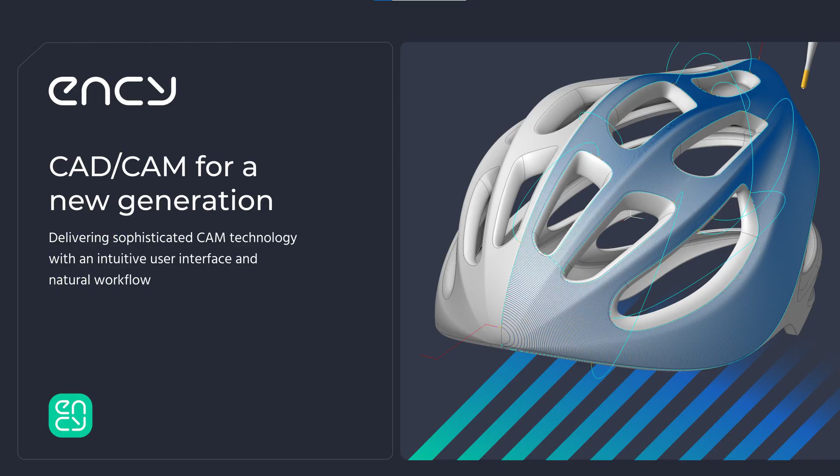First of all, of course, ENCY CAD/CAM software - CAD/CAM for a new generation. If I need to explain and describe this product in one sentence, this is it: delivering sophisticated CAM technology in an intuitive user interface and natural workflow. Why is that important? Because some guy on the internet, I read comments in social media, he started using ENCY several months ago and said, 'This is a technological monster.' And I agree with that. At the same time, we always keep our attention and focus on the interface in order to keep the workflow as simple and intuitive as possible. I believe if we multiply these two factors, the technological complexity and the interface intuitiveness, we get the quality of the CAD/CAM software as a multiplication of these two factors.

Because it's very easy to put more and more buttons in the interface, and you will end up with like 150 buttons on the screen, and you don't know how to use it. So what's the case with all this technology if you don't know how to use it? This is important for us.

Next, our second product, which is equally powerful, is ENCY Robot. This is an offline robot programming platform. It offers ultimate toolpath calculation and kinematics management software for industrial robots.

A couple of words about ENCY Robot. It's very different from ENCY for CNC machines, because when we initially released software for robot programming, we put all the CAD/CAM technology into this software and made it available for robots. By itself that's already impressive, but robots have more complex kinematics, and you need additional tools to manage them. That's why traditional CAD/CAM software cannot program robots. Those of you who do robot programming understand this very well.

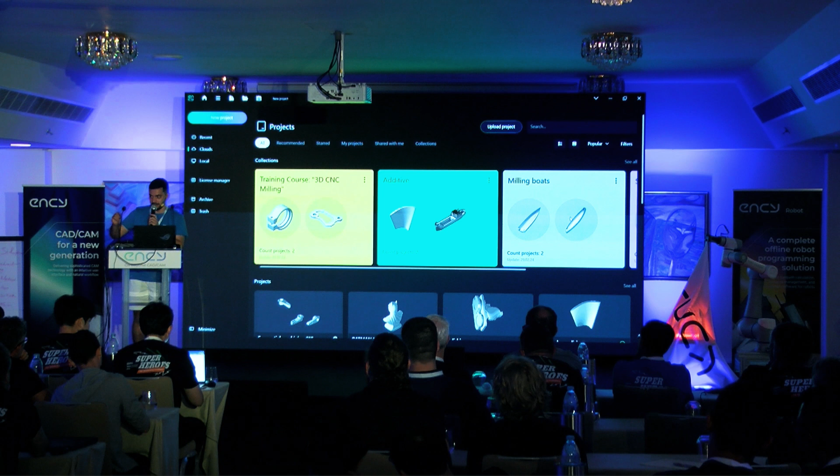In the cloud library, we introduce collections, so you can put projects into collections. You can use it for demos, for example mill-turn projects, put it into a collection, get a link, and send it to the customer, who can see it in a preview. What's the preview? For example, we can see this project from Italy, I believe.

If I click the preview, we have all the project metadata. We can see who is the author of the project, what machine is used, what are the operations in the project, setup, tools, everything. We even can preview the part, and we will also make a visualization of the toolpaths.

And this you can do without opening a project and without actually opening ENCY, because it's just a homepage. You can have it as a separate application. And here we have ENCY, the standard thing, ordinary thing which you are used to. If I want to open the project, I just click this button. Now the project, this is a cloud project, it just got downloaded from the cloud, and now you have your project in front of you.

One more important thing about the homepage: now you have the maintenance notification on top. We believe this will make it easier for you to sell maintenance to end users, because they are always aware of how long the maintenance is left.

So what are the highlights? Quick access to personal and shared library projects, preview of the projects, easy access to collaboration sessions, so all the cloud sessions are always also available from the homepage, and the maintenance banner. What I want to say here is also we have some future plans to put the machine library, post-processor library, 3D models, everything there.

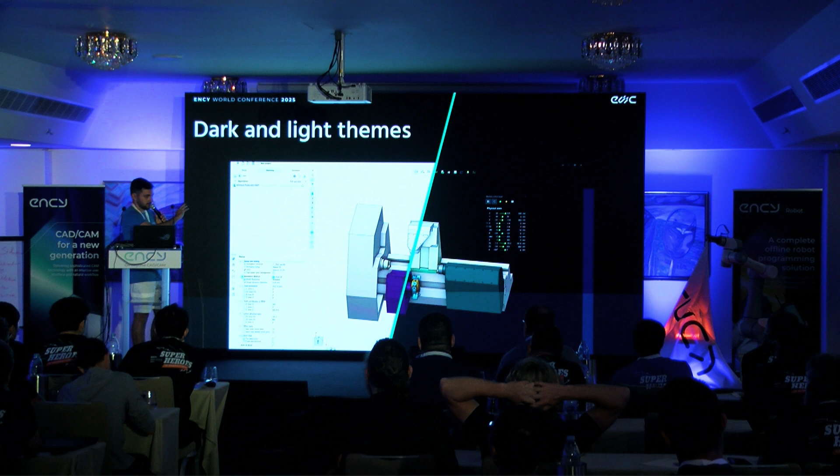Let's move on. Initially, ENCY was introduced in the dark theme. I think this is a good idea, and I like the dark theme very much, but there are still 5% of people who don't like it. During version 1, if the absence of a light theme was a deal breaker for you, now you have an answer to this. You just have a light theme now, so you can switch between dark and light theme. They both look good, and it's very easy to switch in the settings, and you can use either of them. Still, I want to say that we are going to use the dark theme as the main color of the software, and put all the videos in social media with the dark theme. Light theme is an option, let's say.

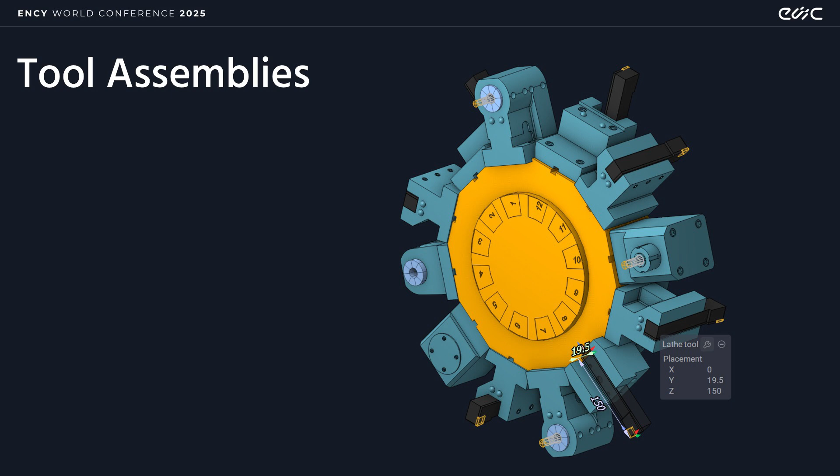Next, here comes the main part, here's the main thing beginning. Many of our customers work with mill-turn machines, we know it for sure. And thanks to our machine-aware technology, we have secured a strong position in this market. But we are making the next step, and today we introduce tool assemblies. This is a requested thing, which was requested for a long time.

So now you can create full tool assemblies, combining holders, adapters, whatever components you have for the cutting tools. I believe this new capability elevates ENCY to an entirely new level, and it's a really important thing. So let's take a look at a quick demo.

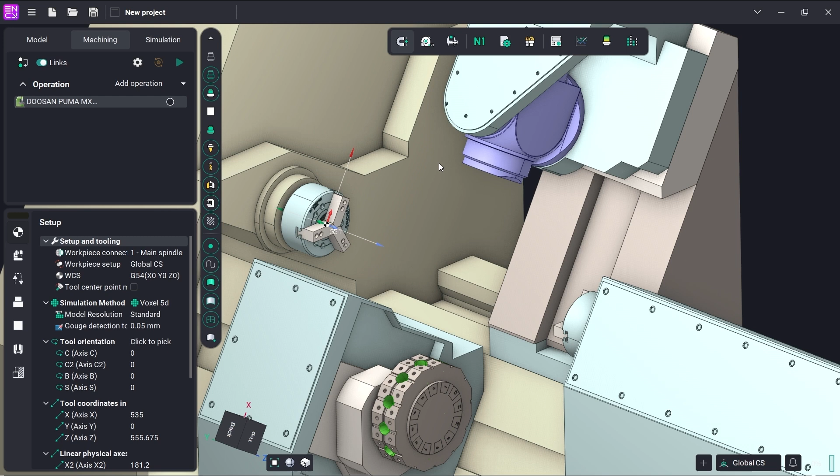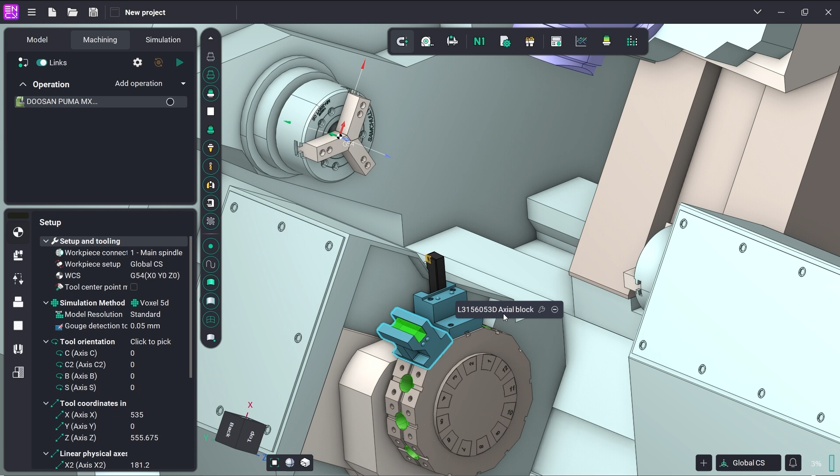So here I have the mill-turn machine, you all know how it looks. Now on the turret head, right here on the screen, I have interactive elements which I can use to create my tools. Right on the screen, without going anywhere, I can just combine my components, which I have in the library, and create tools for right spindle, for left spindle, lathe tools, milling tools, whatever kind of tools is required for this project.

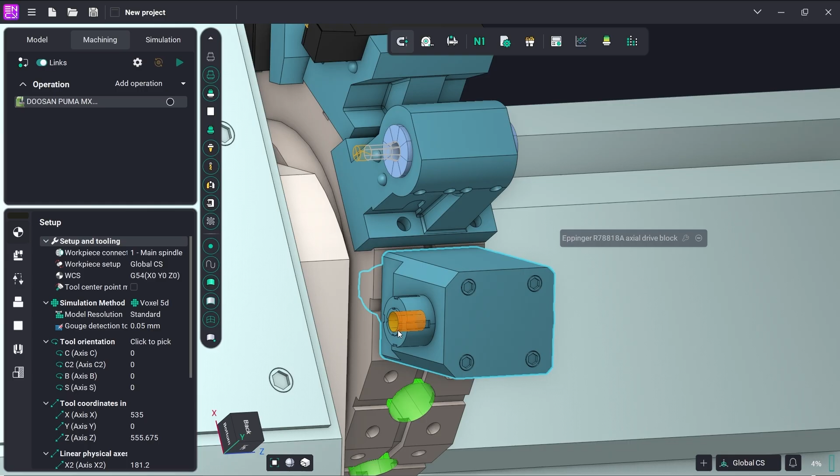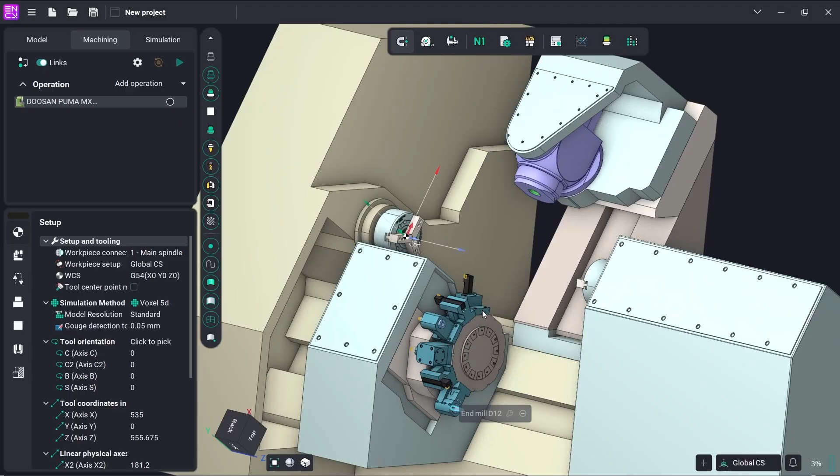Like this, you can combine not only two components, but any amount of components. For example, we have three components here, and I can very easily and very fast create the whole setup for the turret head, without going anywhere, in the same window which I use to create the project. This is how we see it, and I think this is a proper way this complex machine setup should be done, because you don't need to learn it—you just do it right from the beginning because it's intuitive. So you see, like in 30 seconds, I can create a setup with different tools on the turret head.

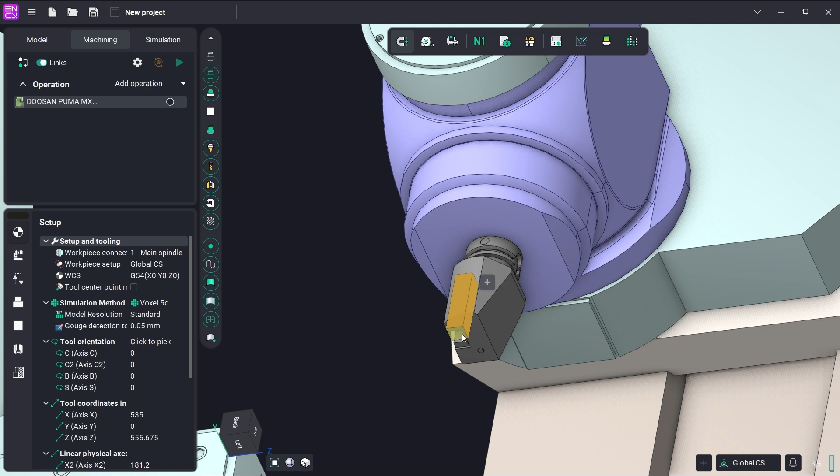And also, of course, I have a milling head in this machine, so I can use the same approach to create a tool for the milling head. Actually, I can put there also a lathe tool, no problem, or a milling tool, whatever. So this is it.

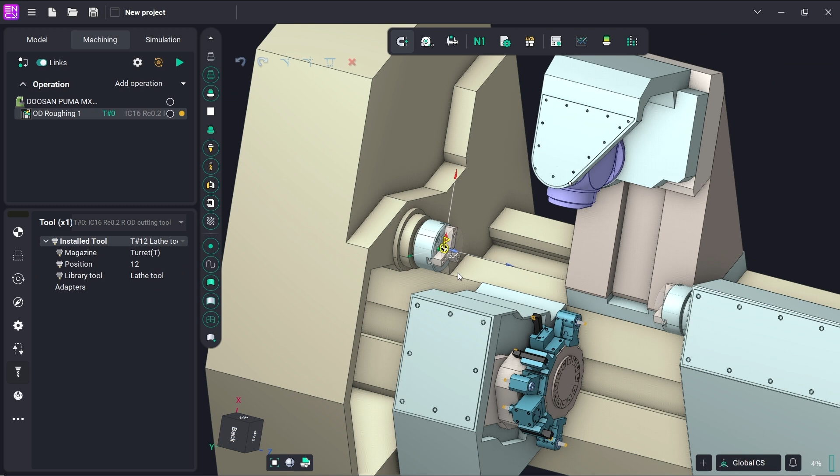Next, when you create an operation, it now knows which tools from the setup are applicable. In the dropdown lists, you have only the tools which you can use for the current operation, for the current spindle, from the setup that you already have.

And now we have a separate window—sorry, need to move it a little bit. So this is a components library. Here we have all possible types of connections from all the tool manufacturers. You have tools here; they are interactive and parametric. You can create your own tools, or you can import tool components from the machine or from tool builders' libraries.

On another tab, you have your machine setup. You can do it from here, or you can do it right from the main screen. What's important here is that when you finish with your setup, you can save it and use it for other projects. You have save and load options. So this is the main thing I want to show about the tool assemblies.

So what are the key highlights? Now you have tool assemblies, first of all. Second, you can import 3D models or create your own—if you don't have a 3D model of the tool, no problem, you can just use our embedded CAD to make quick modeling, no absolutely no problem. You have very detailed visualization, and not only visualization, because the tool assembly geometry is used for collision detection—very important. So now you have a precise tool assembly and all its components, and it's used for toolpath calculation and for collision detection.

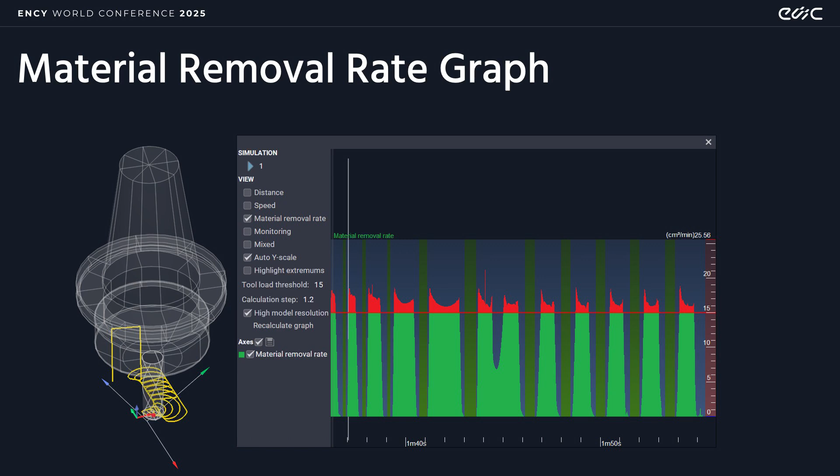Second, the material removal rate graph. This was relatively easy for us to implement, since we have our own simulation engine and already have all the information. Now you can just open this window and see how material is removed throughout the toolpath, for any toolpath.

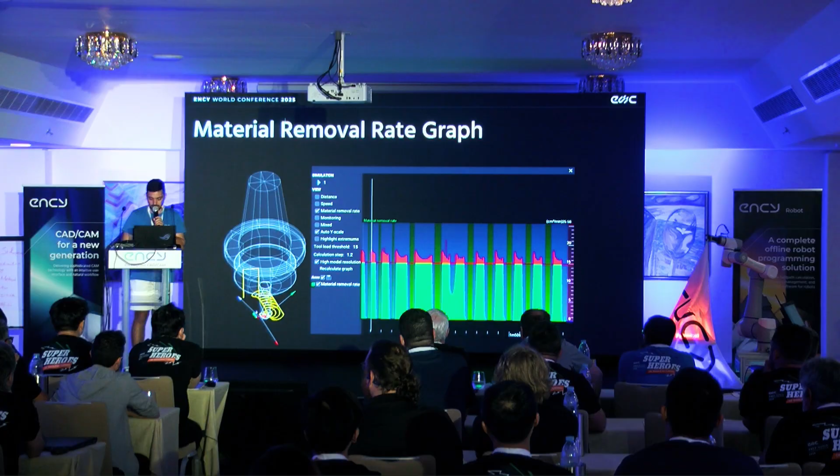Let's take a quick demo. Here is a typical project. I can just open this window and instantly see the material removal rate, and when I drag the mouse along the toolpath, I can see the tool movement at the same time. So I can visualize in which area of the toolpath a particular material removal rate takes place.

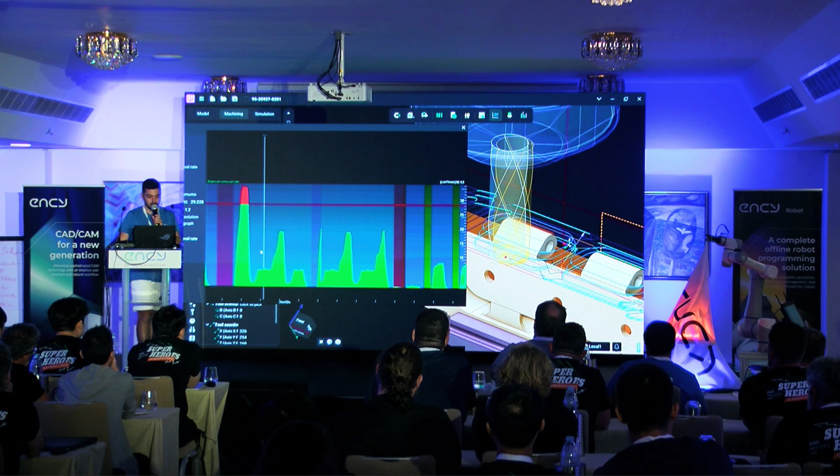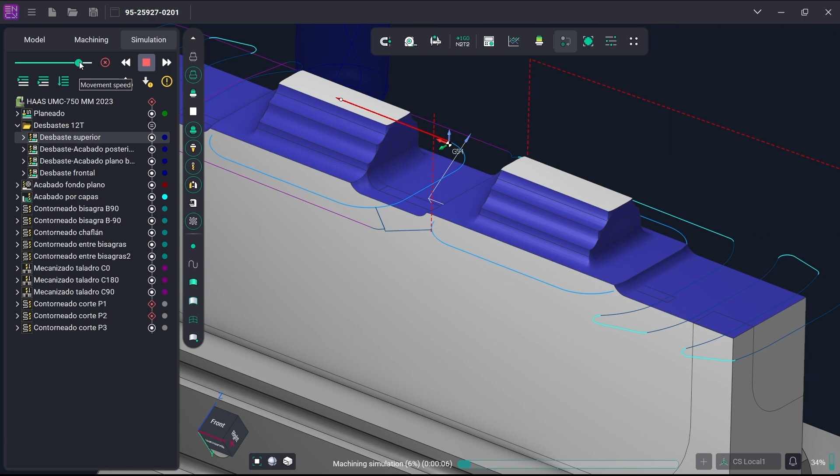You can use this before you launch the NC code, to make sure you're on the safe side and know how your tool will work throughout the toolpath. We don't yet have an algorithm to automatically change feeds and speeds on the operation, but I think that will be the next step. This is also huge for ENCY Tuner, because you can diagnose your NC code, even third-party NC code, with this tool very easily and see how it works.

Next, corner feed control. This is a relatively easy thing, but also very much requested. Now you have the possibility to define gradually how the tool slows down and accelerates while going through sharp corners—and not only sharp corners, but small arcs as well.

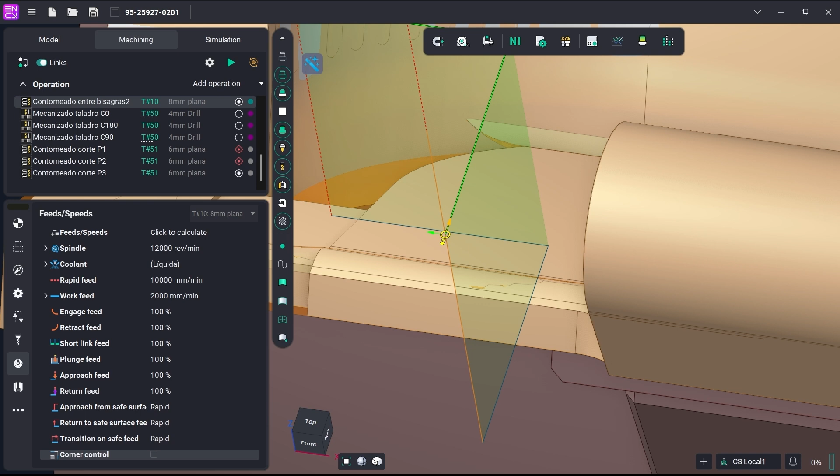Let's take a look. Here is a typical situation: we have a contouring toolpath and two lines of code with constant work feed. We can see the tool going through this corner at constant speed. This is not what we want.

So we enable corner feed control. Here are all the parameters you need—you can define the number of steps, the percentage of slowdown, the step length, everything. Let's recalculate the toolpath and see the result.

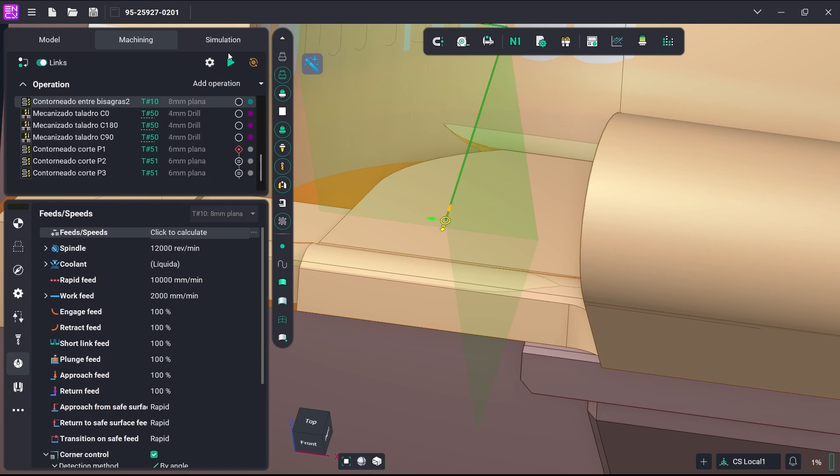I think it's clear, but let's take a look. Now we have several steps: the initial work feed is 2000 still, but the tool gradually slows down and then accelerates. As easy as that, but I think very important for certain situations.

Next, feed control for crossed holes. This is another situation where we need to precisely control feed rates, because if we don't, we can have problems—we can break the tool or fail to achieve the proper precision.

During the conference, we'll have a separate presentation from our dealer in Germany about this feature—he will tell more details. I'll just go ahead for now; you'll learn about it later.

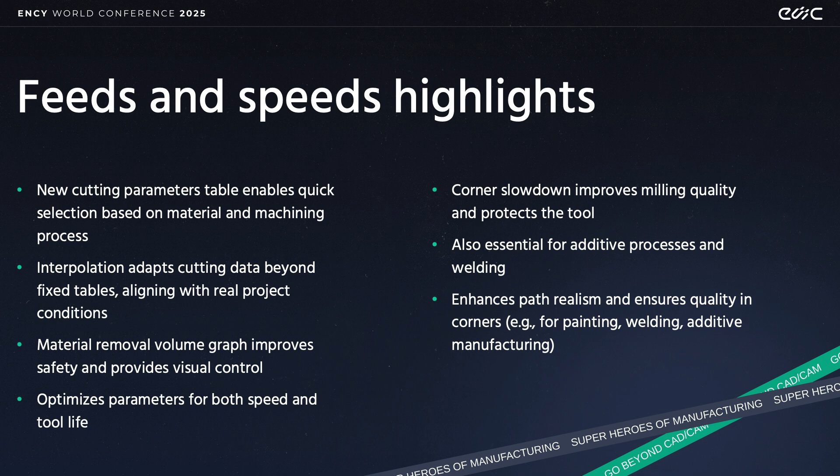So all in all, feeds and speeds are now very different in ENCY version 2—a lot of changes: the cutting parameters table, interpolation of these cutting parameters, the material removal volume graph, corner feed control—a lot of things at the same time for feeds and speeds. I think this will push ENCY to a new level for some customers. This is critical, this is very, very important.

Next comes the robot theme. I think some of you have been waiting for this, so here we are. First of all, we've had our collision avoidance algorithm for several years, and in some situations it works quite well. But as you all know, in some situations it struggles, and even when it works well, it's quite slow and makes a toolpath that can be scary for people—when the robot moves very fast with a very small gap, people don't like it. It's still a correct toolpath and it works, but people want to be a little more on the safe side.

So we completely re-engineered the collision avoidance algorithm. Not actually re-engineered, it's a new thing, okay? We built it from zero. Completely different approach, which takes into account not the local part of the toolpath, not the local area, but the whole toolpath, okay? It works on a different principle, and the main thing is it works now very fast. This allowed us to build something, in my opinion, very exciting. I will show you in a moment.

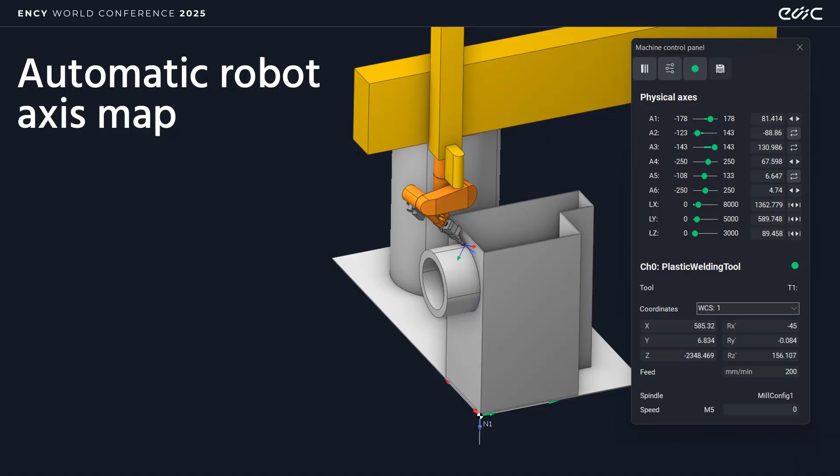So thanks to the new collision avoidance algorithm, now we have automatic robot axis map. Those of you who make robot programming know it for sure. But in some situations, for example when we have a robot on a 3-axis gantry, it's quite challenging to do it, especially to teach customers how to use it. So now you don't have to do this. Let's take a look.

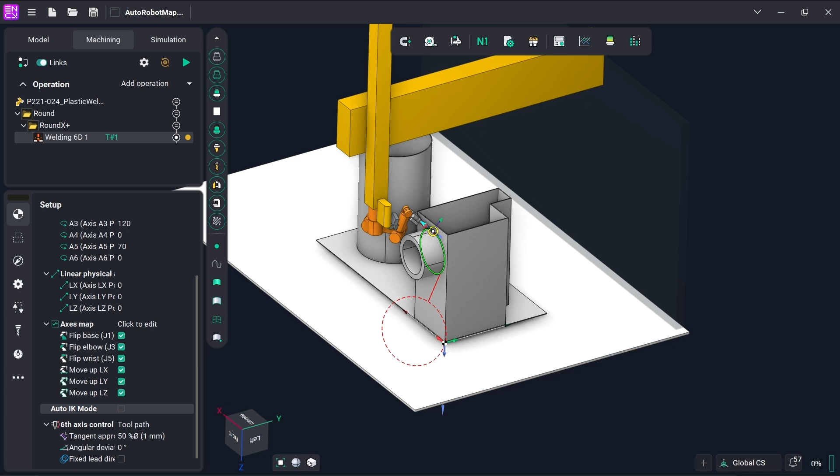Here is a typical situation. We have a robot, 6-axis robot on the gantry, okay? 6 axis of the robot, 3 axis of the gantry, 9 axis all in all together. We also have a 6-axis toolpath here, which is also complicating things.

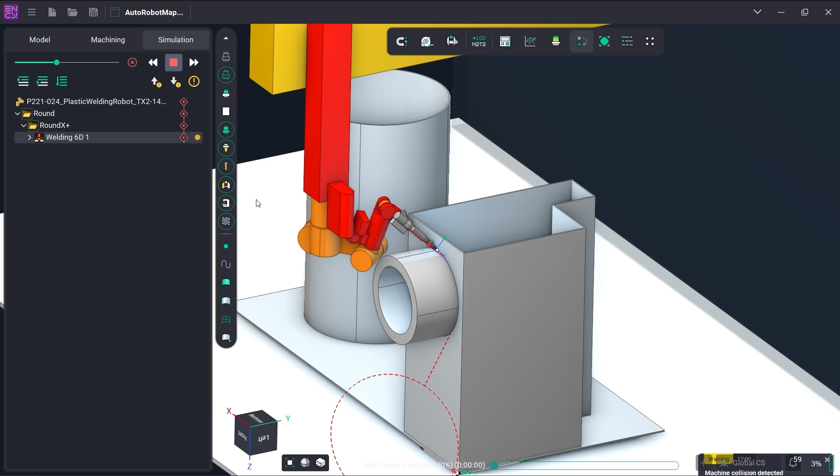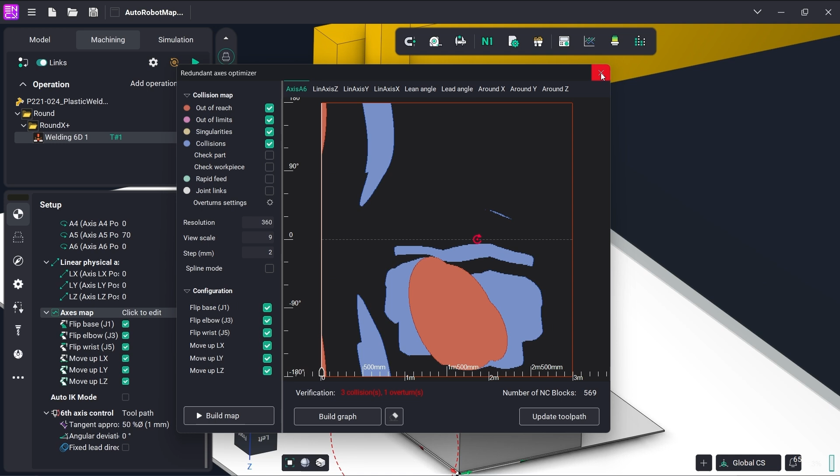But no problem. Let's first calculate the toolpath as is, as it usually happens. So we calculated and see, okay, we have a lot of problems. Everything is red, we have overturn, which means we run out of the limits at some point on some axis. We open the robot axis map and now have to spend quite a lot of time trying to avoid all these collisions. Yes, it's visual, but the problem is when you have like 9 tabs of it, it's not so good.

So now there is one magic button. You just enable it, calculate the toolpath, okay, and that's it. You have the toolpath optimized, everything is collision free.

So I think this feature alone is already enough for ENCY Robot version 2, okay? But there are more things coming.

So, automatic robot axis map. What's very important, okay? It's automatic now. You can tell your customers, here's a magic button, you click it, you have the toolpath. After that, you can tweak the robot axis map if you want, but you already have the toolpath, which is collision free, which you can run on the robot. It will work. And also very important is that the calculation time is very fast. So yeah, it takes some time, but it's quick, I would say.

And one more important thing about this automation is that now the automatic robot axis map, automatic robot kinematics calculation, will put our API solutions to the next level, because now you don't have to force the user to interact with the software when you calculate the toolpath for the robot. This means you can use ENCY in the background to calculate toolpaths and be sure that the kinematics in this toolpath is managed okay. So you can just run simulation and run the program without interaction of the user with the main interface. I think this is very important.

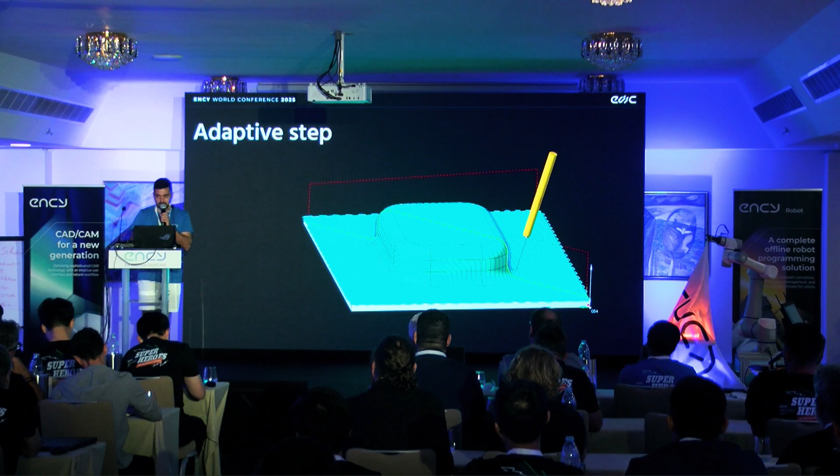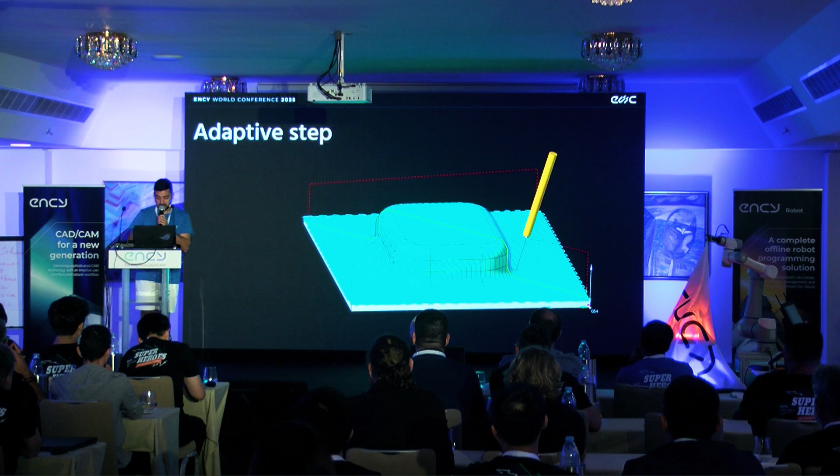So this year we also have a pack of updates for 5D surface. Let's take a look. First of all, the adaptive step, okay? You may know it works not so well in many situations. Now, in certain situations, it works much better. Let me just make a quick demo.

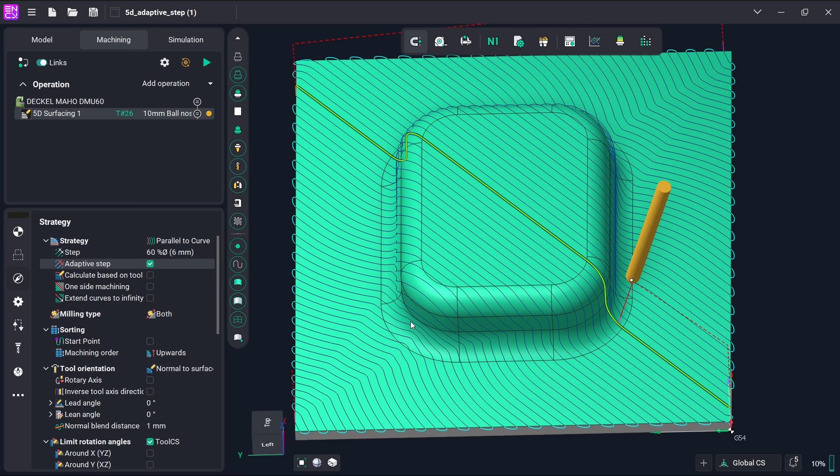So this is a typical situation when the toolpath is not good, not consistent. For finishing, this is not what you want. So now you just enable adaptive step, and you have consistent toolpath throughout the surface, and it works for complex shapes, not only simple shapes. All these steep areas are now machined evenly, and you get the surface quality that you need.

Next, barrel tool support. Last year at the conference, in one presentation, a lack of barrel tool support was mentioned as one of the main deal breakers for our dealers. So now we introduce barrel tool support for finishing.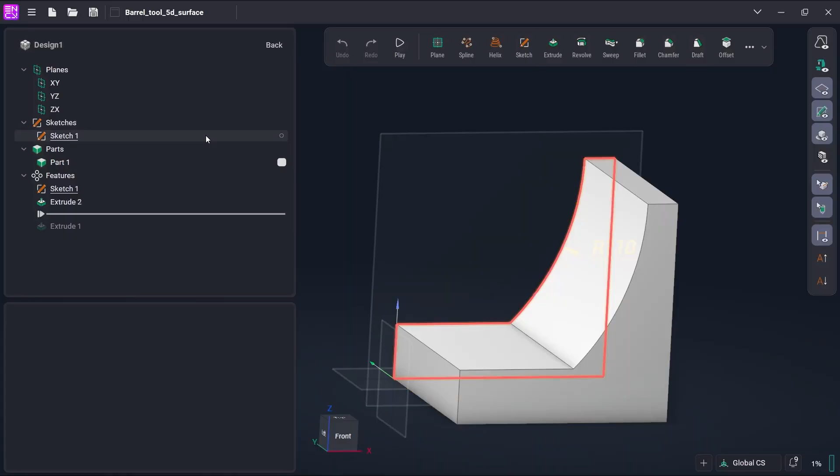Let's take a quick look. Here we have the part. The curvature of this wall is 110 millimeters, and we will use the barrel tool, which has a curvature of 100 millimeters, so slightly less than the wall. This is the barrel tool.

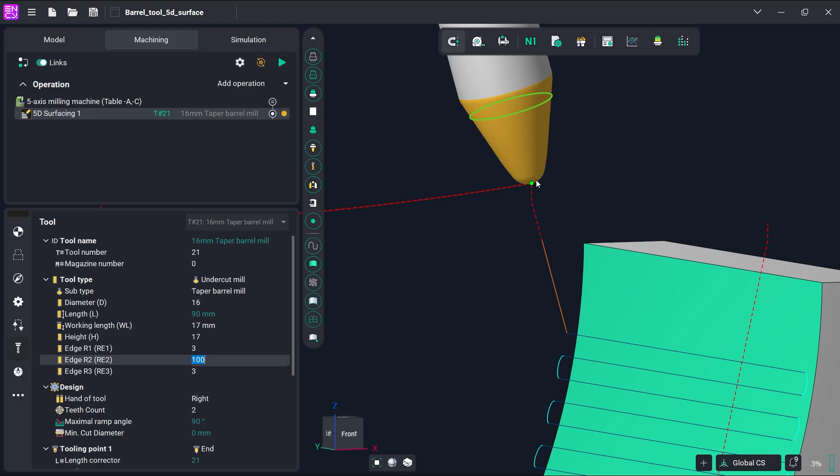Maybe you cannot see the barrel tool clearly on the screen because it has a very big radius, but it is a barrel tool. You can move the contact points right on the screen interactively, and you can also define the contact points in the inspector with the parameters.

Let's also take a look at another thing. Here we have enabled the check holder, so that when we make this machining, the tool is not touching the part. This is important. So let's calculate the toolpath.

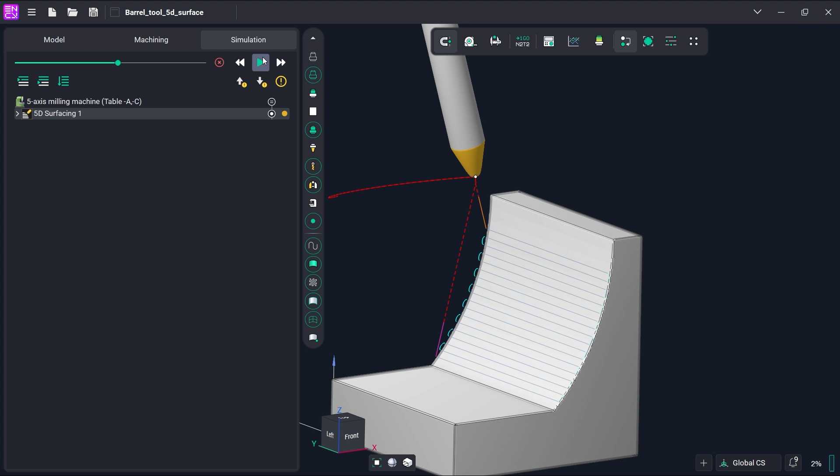Okay, we have it. Let's take a look at the simulation. With these big steps, we can get the required surface quality really fast. I think it's clear for you, okay, typical thing.

But still, we can take a look at verify compare and see that we have a very clean surface. And while the tool is moving down, now we can see that it comes closer and closer to the edge of the part. It should not collide.

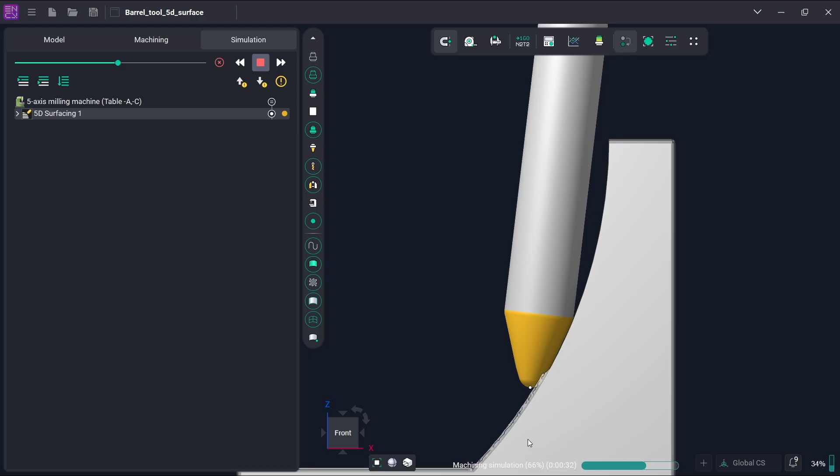And now the check holder will step in, and it will start inclination of the tool in a moment. Like this. Now you can see that the tool is working with its spherical part already. Of course, the surface quality at the bottom will not be the same, but this is the geometry of the part. This is how it goes.

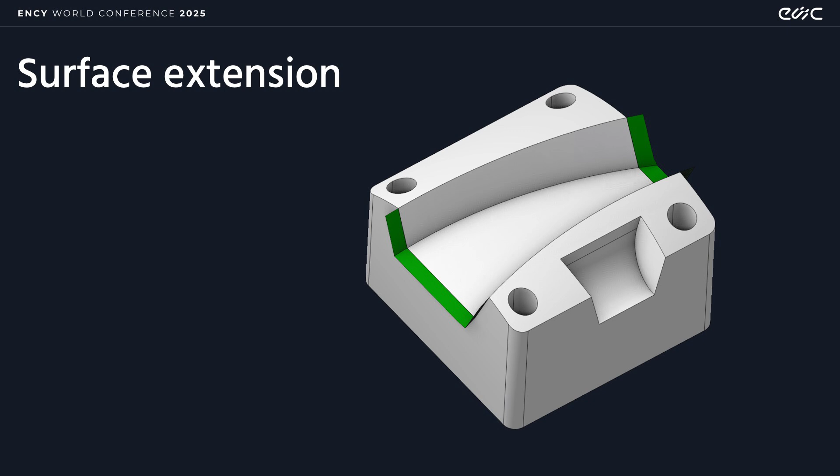Next thing for 5D surfacing - actually, it's not only for 5D surfacing, it's for any finishing operation. In many situations, you need to preserve sharp edges at your parts, so you need to extend your toolpath to go a little bit more than required. Now you have a tool you can use in the CAD section of the software. You just extend the surfaces and can use it with any operation, not only 5D surfacing.

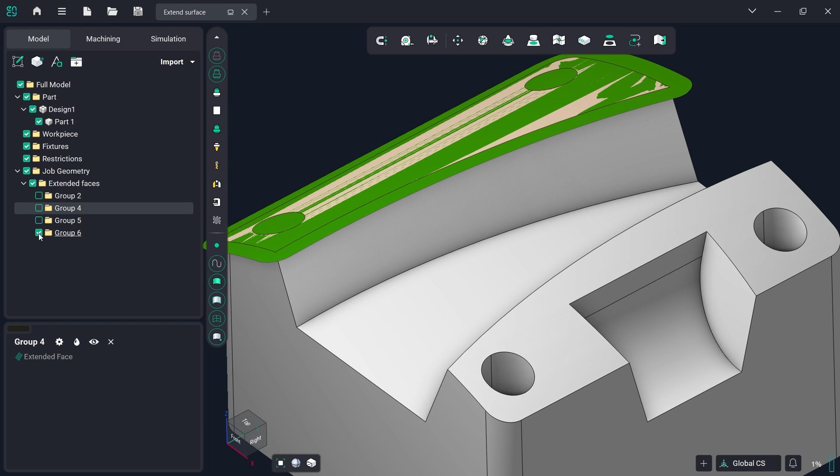So let's have a quick demo of this. In this part, I already have some extended surfaces. There are 3 different algorithms for how we calculate the surface extension, and you can use these surfaces for job assignments in the operations so that you calculate the operations relying on these extended surfaces.

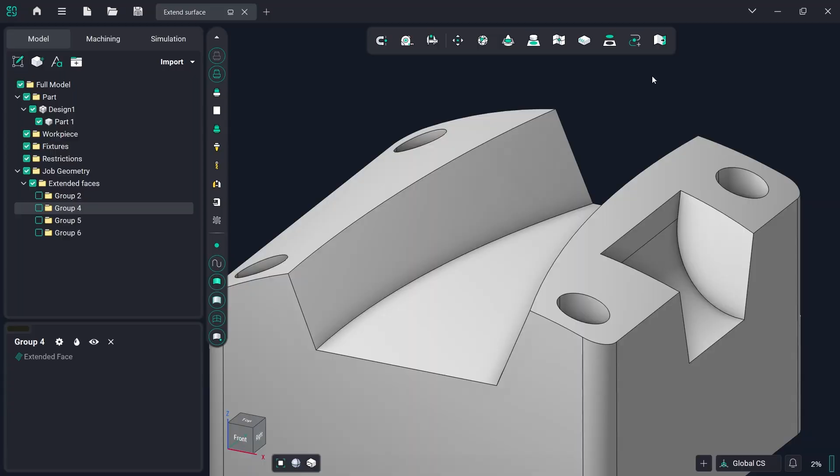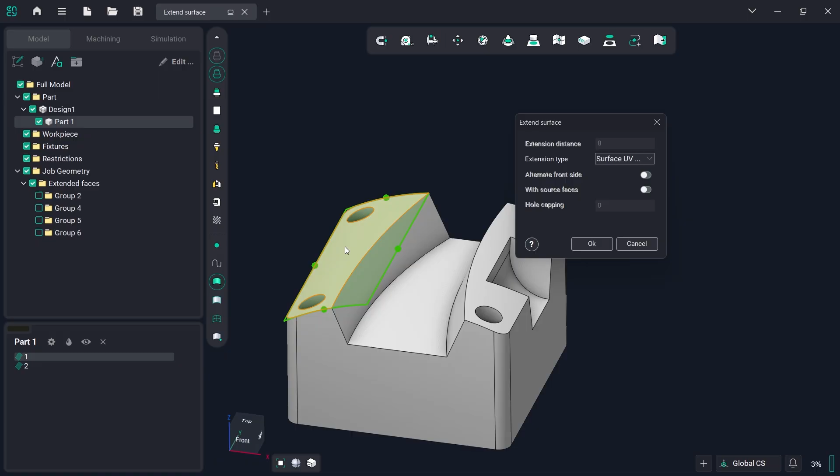Here are the different approaches you can use for surface extension, depending on the shape of the particular surface. For example, you can use a UV box, also with interactive elements like this. In many situations, this will save you a lot of time, and your customer too.

I see you're smiling, guys. Yeah, you like it. I like it too. Simple thing, but very important. Okay, fine, let's move on.

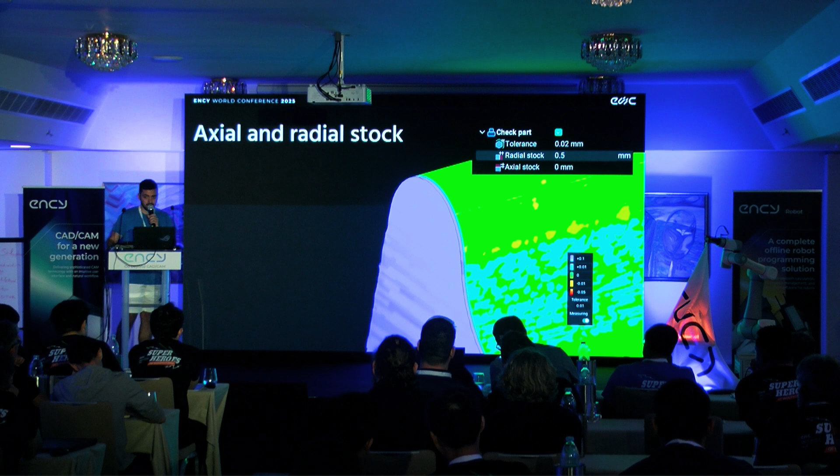Next thing about the surfacing operation: before, in version 1, we had only one option to define the stock - equidistant stock from the model. Now it's separated - you can separately define axial stock and radial stock. This is not something special, but you should know it's now there in the 5D surfacing operation.

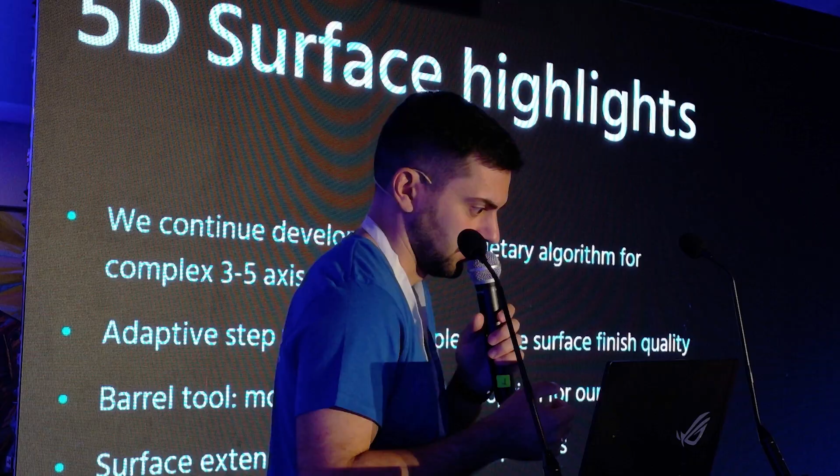So let's sum up and move on. I'd like to emphasize, also very important, that 5D surfacing, despite the name, is not only for 5-axis machining, but also usable for 3-axis, 4-axis, and 5-axis machining. So now we have adaptive step for better complex shape uniform toolpath, barrel tool support, surface extension, and separate stock allowances for radial and axial stock. Quite a lot of things, and I think it's a quite significant upgrade for the surfacing operation.

Next topic I want to cover today is additive manufacturing. Additive manufacturing is a kind of newer niche, newer solution. Of course there are a lot of different solutions for additive manufacturing out there, and we also built our own proprietary additive manufacturing solution. It's very important - I always say proprietary because I know how important it is to have proprietary code, guys. You cannot imagine. So we developed ourselves some algorithms, which I will show you in a moment.

What I want to say is that we started early, and thanks to this fact, we can already observe in our license sales statistics that we have a lot of additive manufacturing licenses sold during the last year, and this is growing.

We can see there is a potential. So what's our take and our vision and our niche for additive manufacturing? This is non-planar slicing, because planar slicing is something which is, we can say, solved. There are a lot of solutions for planar slicing, relatively easy, a lot of open source slicers for different materials, different processes and applications. But in our opinion, non-planar slicing is something where software now struggles, and there is a space for us, a niche for us. At least this is how we can see it.

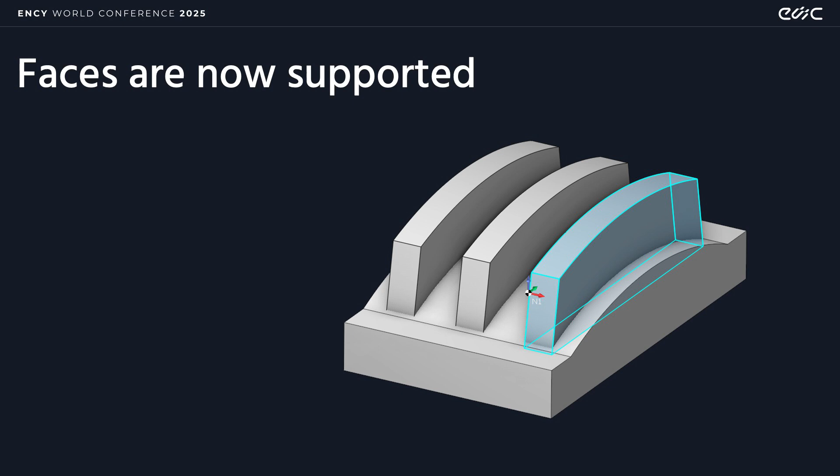First, when we introduced non-planar slicing last year, there was only a possibility to use mesh models to define job assignment. Now you can select also the faces. You can use solid models for this. Inside, I want to say that they are still transformed into meshes, but with faces. If your model has faces, with solid model, the toolpaths are better and the calculation time is also better for faces.

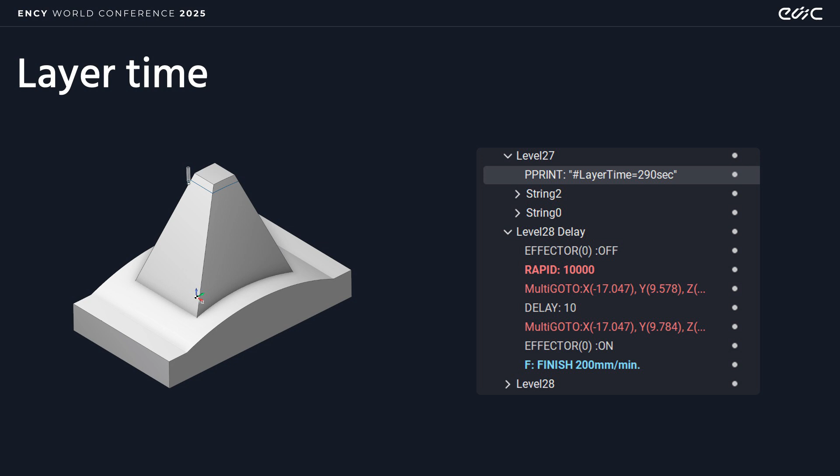So that's it. Next, layer time. Especially in situations when you have this kind of part and each layer, the higher you go, the layer is shorter, shorter, shorter. The temperature is building up, and we need to control it. This is a specific requirement for additive manufacturing.

Now we have a full-featured layer time option. You can define your desired layer time. You can define your minimum feed rate. You can enable or disable the delay option, so you can stop your additive manufacturing process, wait until the part is cooling down, and then continue. So this is it. And this layer time, what was the challenge actually with layer time?

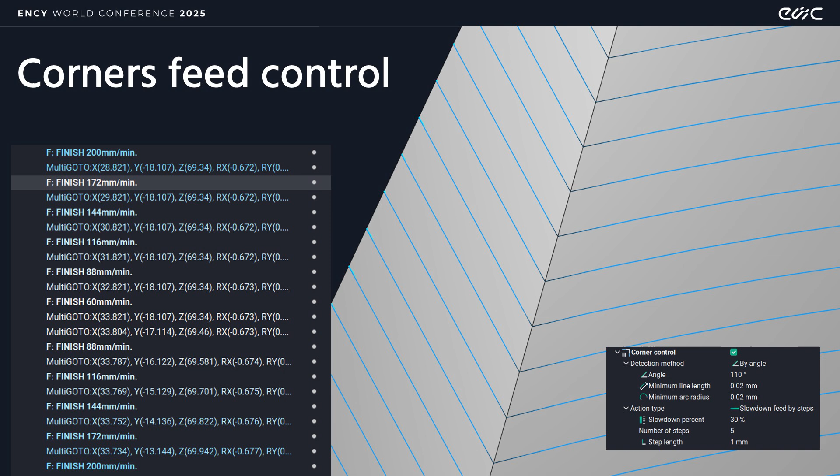Because we have another thing, yeah, corner feed control. We had it in the milling section, but it's also available for additive manufacturing, for different reasons. Because sharp edges, as you know, cannot be executed like in the control program, the equipment is always slowing down at these sharp edges. In order to provide a correct control program, we need to take it into account and put corresponding changes into the control program so it can be executed and the quality of the additive technology is okay.

And when we have corner feed control, it also influences the layer time. So we kind of blended all these algorithms together. They take one another into account and work together very well. This is the challenge which we had in this area.

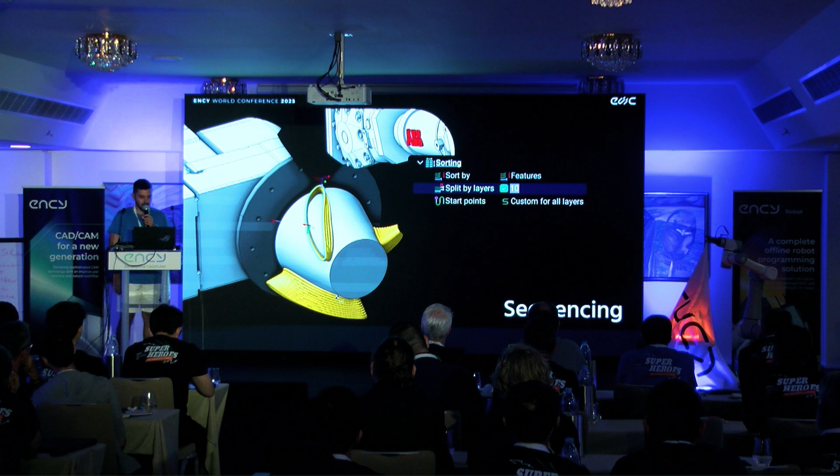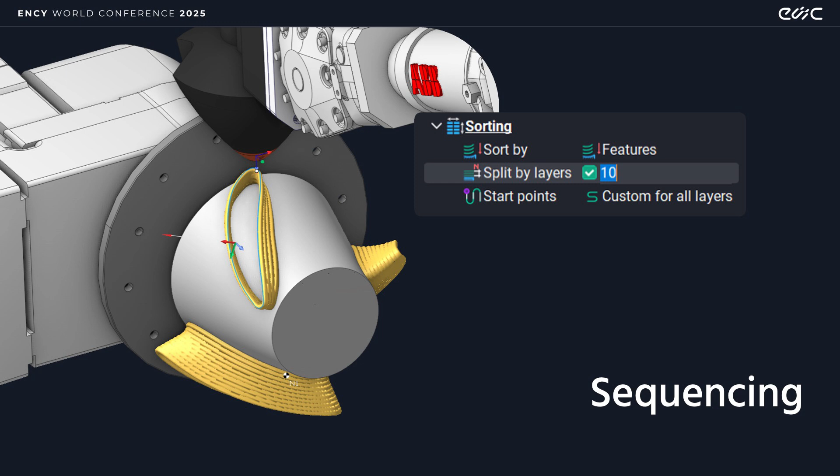Next, sorting. For milling, we have sorting by layers or by features. It's simple, but additive manufacturing is a different area, and it has its own requirements. For additive manufacturing, we added a possibility to not only sort by one layer, but for whatever amount of layers you want. You can define, say, 10 layers, 5 layers, whatever amount, and now the toolpath is sorted. This is important, for example, for use cases when you have geometrical limitations, so you cannot build one feature and the second feature because it will not allow you geometrically — you will have collisions. So you have this flexibility now.

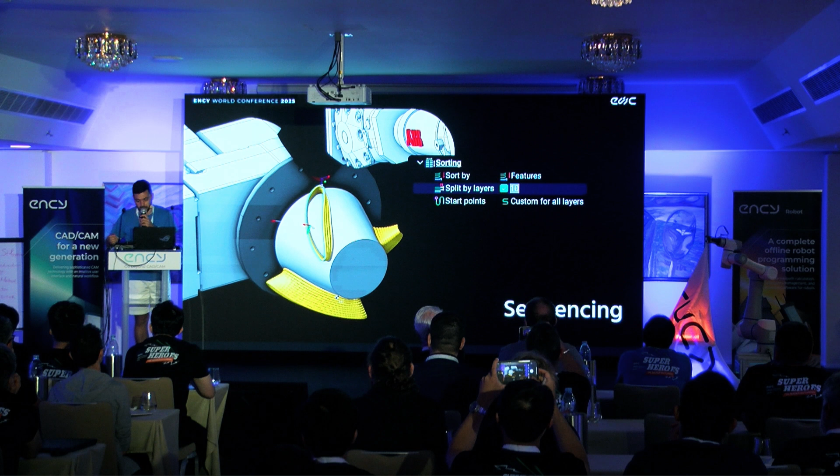Next, some interactive features for layers, start and end points. Now you can define this is my starting point, just one point, and shift your connection points at every layer as usual, or you can use a spline, draw it on the screen, and this will be your connection curve, used for layers' start and finish.

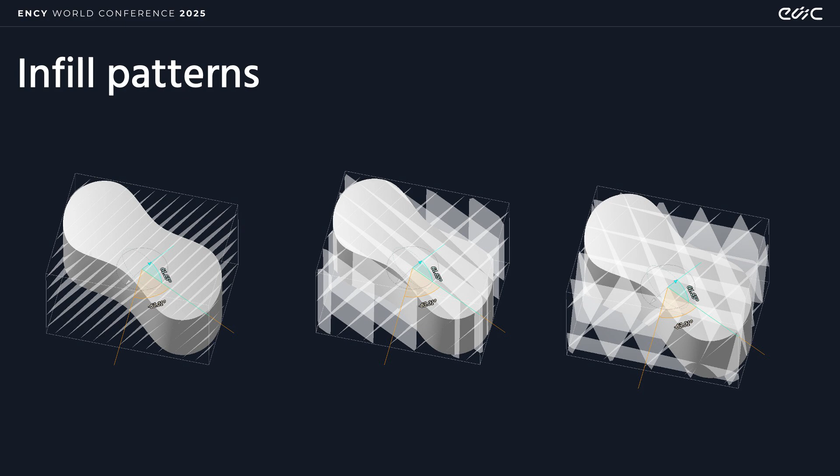Next, infill patterns. At first we had only lines, now we have also grid and triangles. We will put more different shapes here. What's important to say about infills in non-planar slicing is that there is also a possibility to define the orientation, independently from the walls. You can change the vector and define the orientation of internal infills right on the screen interactively, very easy. I will show you in a moment.

And also tool orientation options. First, when we introduced the non-planar slicing algorithm, it had only normal to surface.

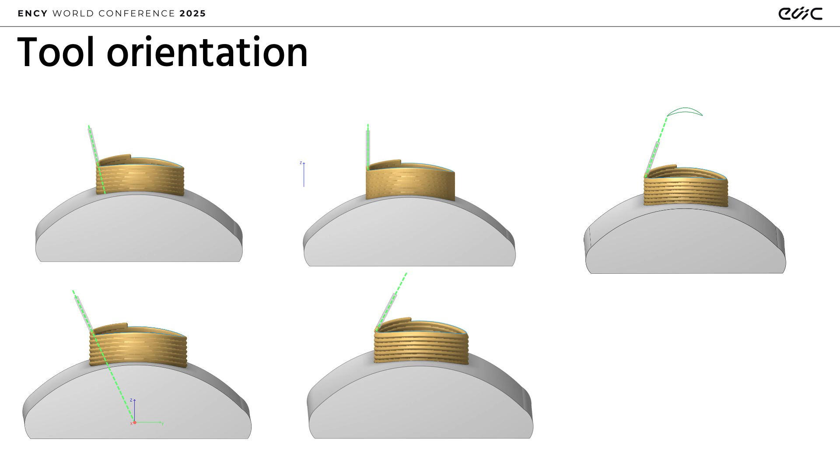Now it has all 5-axis tool axis control options, like through point, through curve, through rotary axis, normal to surface, fixed, whatever you want.

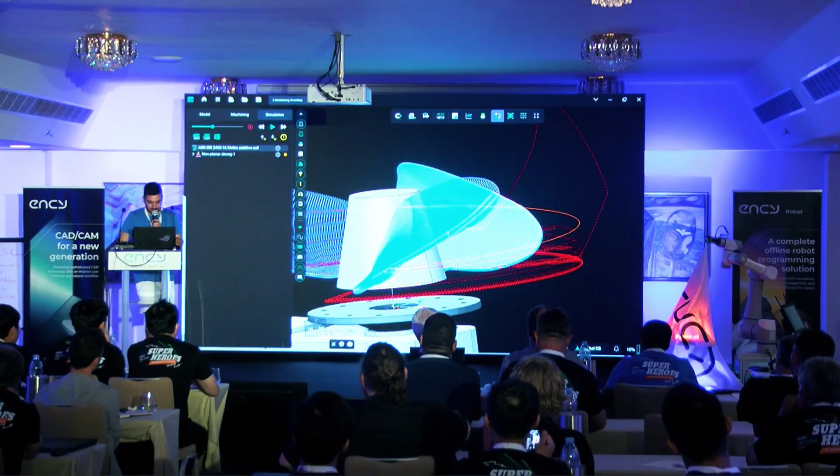So let's have a quick demo. Here is the project, here is the toolpath. If I go to the machining, you probably can see these red lines, which are transitions. They happen every 10 layers, because in the parameters I have this split by layers set to 10. These are the layer sorting.

What I want to show you is that now in the job assignment, we also have a connection curve. Actually, this is a spline. I can just take the point and, right on the screen, change it interactively. Now I will recalculate the toolpath, and the intersection of this curve with the feature will be used to connect the layers.

If I go to simulation now, you can see here is the new connection, from layer to layer transition, in this toolpath. So it's very easy to use, very intuitive, interactive. This is what we like, this is how we usually do it.

Next, let's take a look at the infill patterns, also an interactive feature. Am I good at time? Okay, thank you.

In the non-planar slicing, you have some different infill patterns. Here we have lines, grids, and triangles. And we have this interactive arrow on the screen, you can just change the orientation, or define it more precisely if you need.

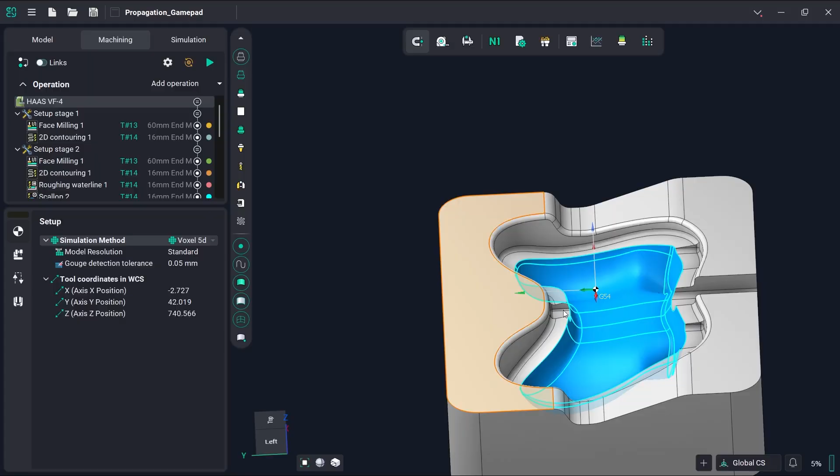So, like this, you can just select now the area you want to machine very fast. Or, for example, the fillet is recognized, so it detects the fillet, and with one mouse click you can now select the whole fillet of the part instead of clicking every surface.

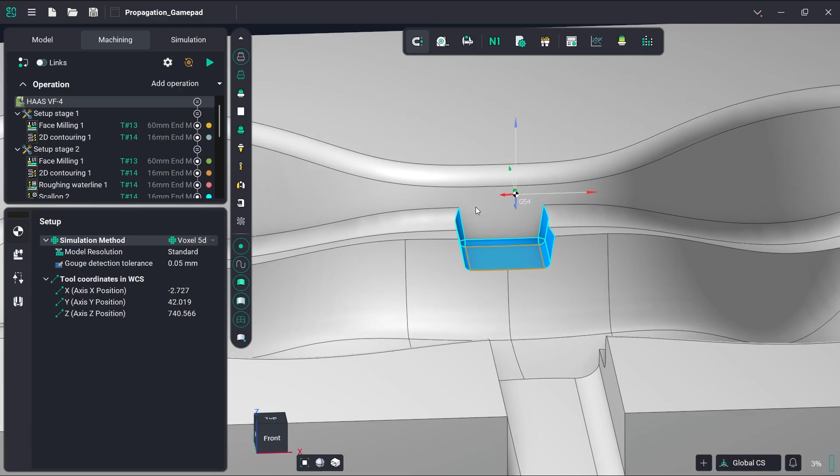Or for example, the outer border of the part, or the pockets. And also, like this, with a couple of clicks, I can select the pocket for machining.

So it's maybe not such a complex thing to have in a CAD/CAM software, but still very important for time efficiency, and we remember that time efficiency is the number one thing.

Next, here comes the second version of ENCY Tuner this year, and we made some fundamental changes, I would say.

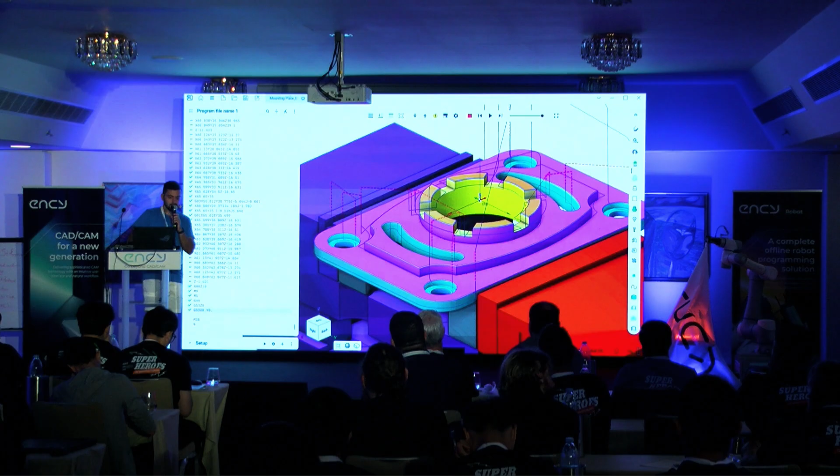First of all, we completely re-engineered the interface. Now it's more clear, and most important, the workflow is now much more straightforward and automated. So users will have much less confusion on how to properly use ENCY Tuner.

Second thing, the main bottleneck which we had for ENCY Tuner for the first year is the interpreters problem. Now you can configure and customize an interpreter in a wizard very easily like this, and in a matter of a couple minutes you can change your interpreters and generate the interpreter you need.

For your particular customer, and that's it. We hope that with this update, this upgrade, next year we will have a lot of sales of ENCY Tuner, because now it's much easier. It's night and day.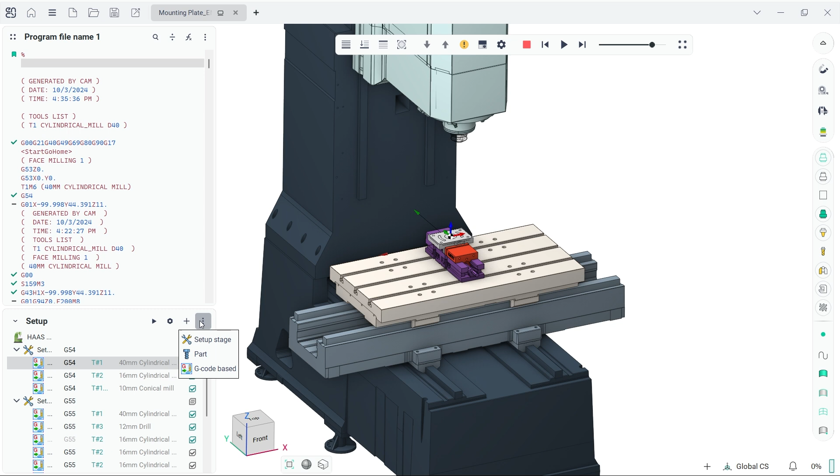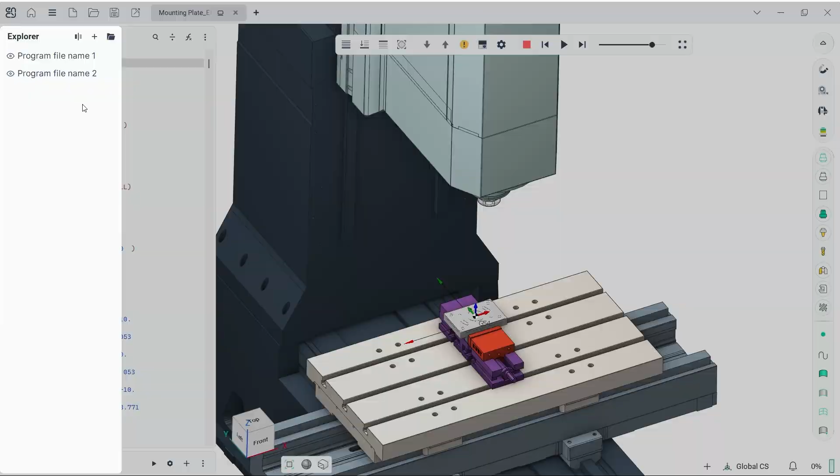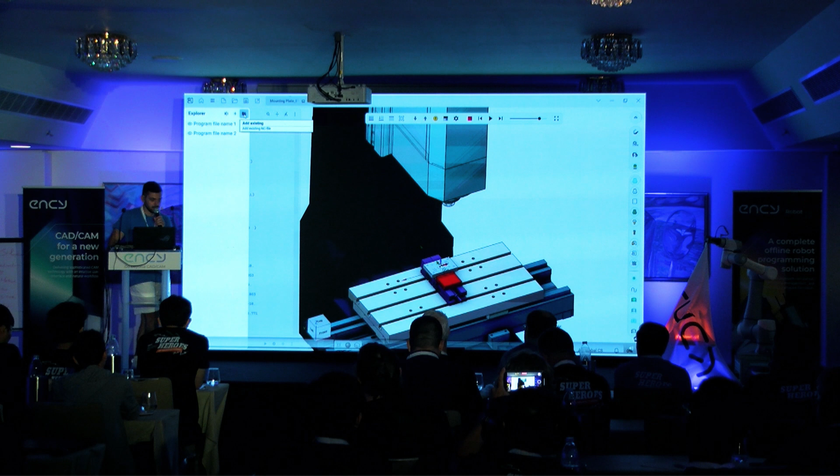So now in the interface, on the left here we have the G-code. The simulation is on top, so it's more clear, but you still have all the setup things, and also the inspector with all the parameters, but it's now closed by default so you don't bother with this from the beginning. If you need it, you can move it to the right and change its size. In the middle you always have your simulation. Also, the program explorer is now floating on top of the interface, and you can use a compare tool. Basically that's it.

Let's have a quick simulation run. The most important thing about ENCY Tuner is the native compatibility with ENCY, but at the same time you can use it for third-party code, G-code management. This is a very powerful software for shop floor.

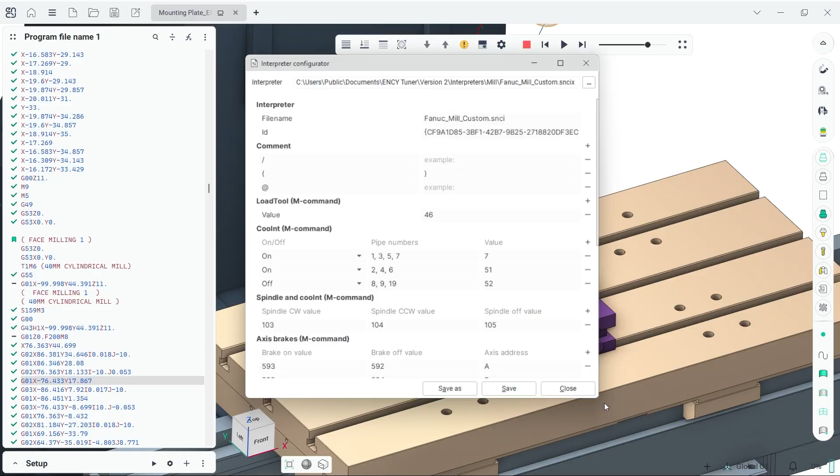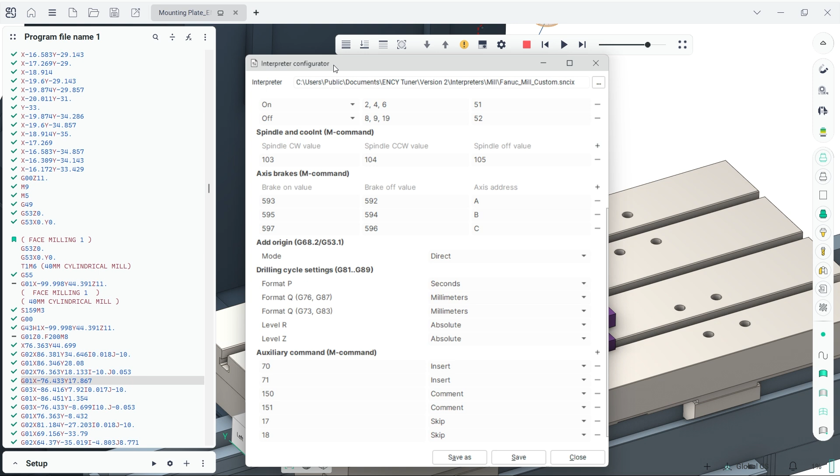And here's the interpreter configurator. You just choose the interpreter you want to configure -- we have new interpreters -- and with this window you just define the parameters you want in your interpreter. Very fast, no coding required. Of course, it's not a 100% no-code solution; you will still have to make some customizations, but it's now night and day, maybe 10 to 100 times faster, with less required skills.

In ENCY Tuner 2.0 we have a new interface, better, lighter, and most importantly a straightforward workflow now, plus interpreters that are easy to configure. We tried to solve all the problems we experienced with ENCY Tuner, and we believe version 2 will succeed and we'll have a lot of sales now.

Along with configurable interpreters, this year we also introduced post-processors, which also support configuration with this kind of screen. Many of you already know how to develop post-processors -- that's not a problem for many -- but in some situations, to customize the post-processor, you need to make some subtle changes.

Now you don't even need to do any coding. You just open the post-processor, make some changes, generate it, and after that you can continue making changes. What's good about this is that all post-processors generated with this wizard will be the same. This is important, because if you build post-processors from scratch, everybody takes their own approach, and it's hard to modify a post-processor made by someone else. Now the foundation of our post-processor is standard, and only the customizations differ.

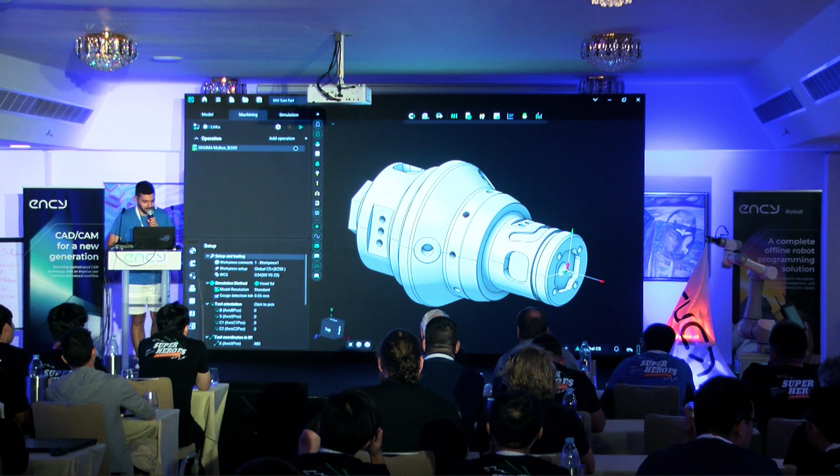Here I have a part, quite a complex mill-turn part with a lot of elements. Now I can just add a new operation and click auto generate. Now it's doing its thing, preparing the model for AI vision.

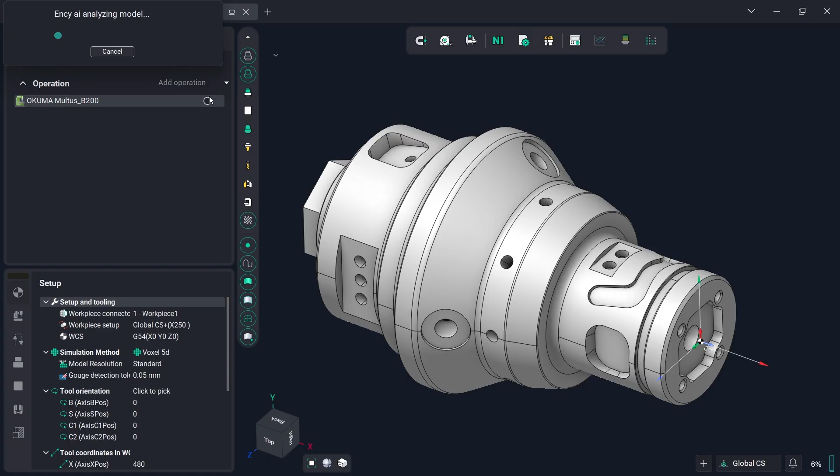It's sending the model to the server, making some changes, running some searches, and now we have the process actually generated. Thank you.

Look, we have lathe facing, OD roughing, OD finishing — all the operations we will really need for this part. Now I can quickly change the job assignment with a few tweaks.

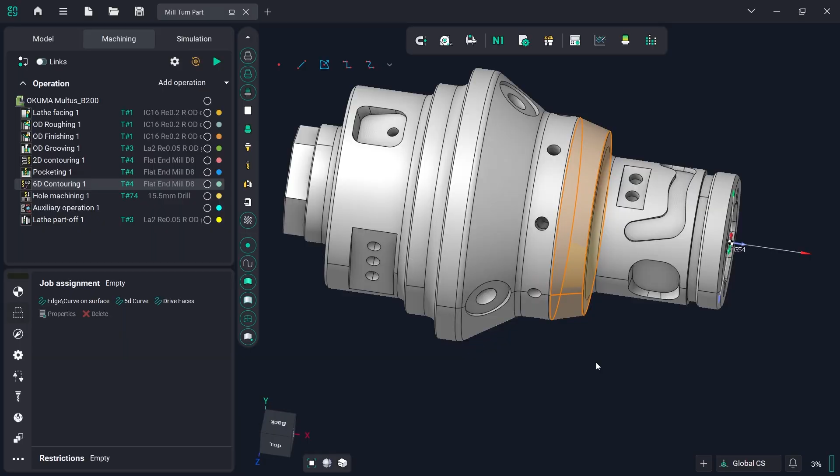We will definitely need 2D contouring for this part, pocketing maybe for these pockets, and also contouring for these other contours. I already have all the necessary operations.

This is not a complete technological process, and at the end you see it puts part-off operation. So overall it's more or less correct. I can work with it and use it as a foundation to save me a lot of time.

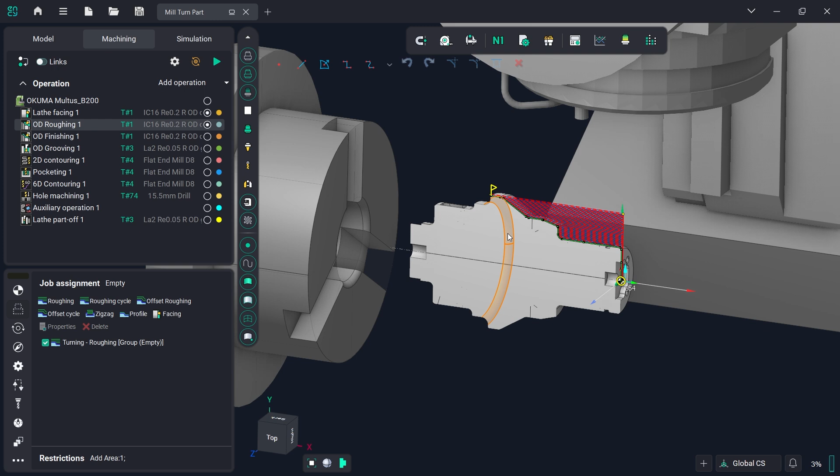With a few more tweaks, I can also calculate toolpaths and see the result. I think it's really impressive, and we are going to continue this development because we can see that it actually works.

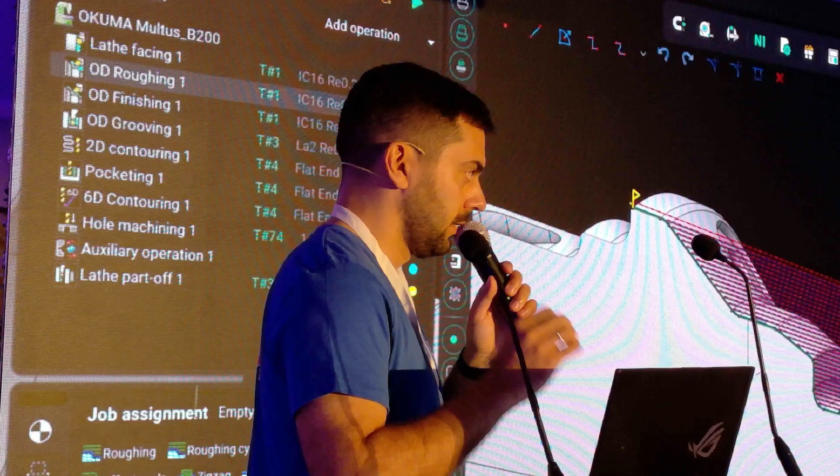What I want to say about this is that we need your participation. We need to collaborate with you, because the main thing we need to make this AI algorithm work better is data.

We need projects — we discussed this with guys from Italy and other people. We need more projects, because we teach our AI assistant on real projects from real customers with real parts.

This is very important. The more projects you provide us, the better the results will be, and the better the sales will be, because people will see this as a huge selling point, in my opinion.

So you can already show it, and it just works. I think people will like it eventually. So, fine.

To finish the AI topic, I told you we have a dedicated team, which is very important, who work only on implementing and developing AI solutions for CAD/CAM. It's very important that we do not send any classified information to our server — we do the AI work locally on the user's PC.

With ENCY now, we install the neural network on the PC and it works locally. This is not a big network, not like ChatGPT — it's small, and it's our own, self-taught network. We did the teaching ourselves, and we keep teaching it with every update. It gets better and better, and it works locally on the customer's PC.

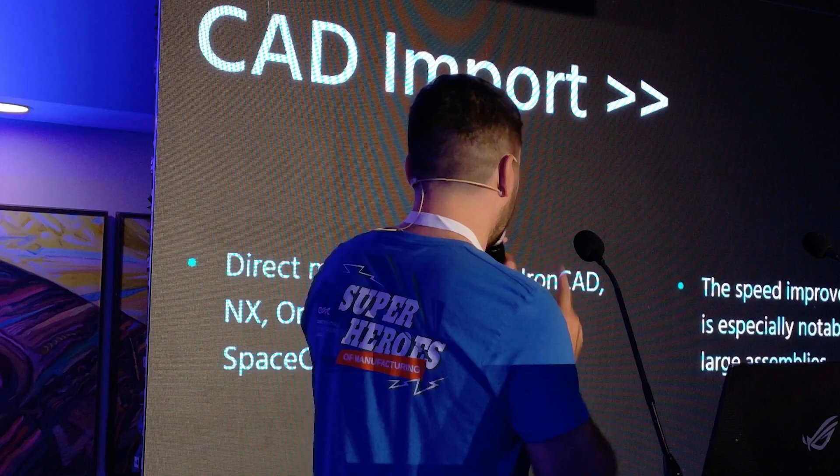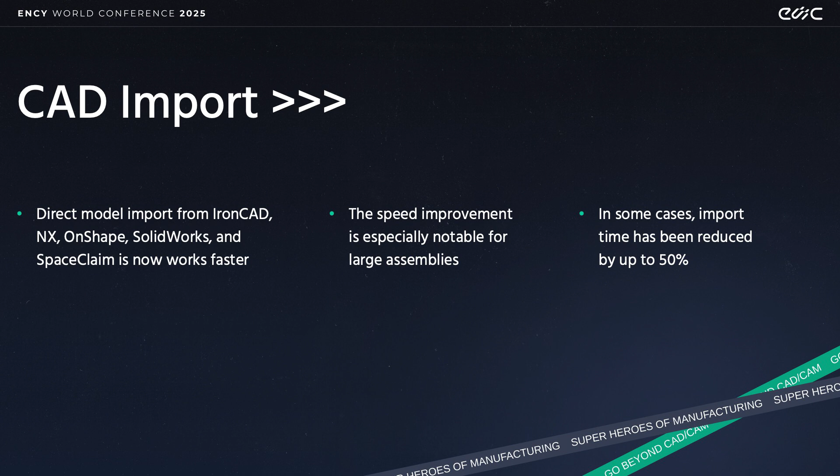In version 2, we have much faster CAD import. You may have experienced problems importing big 3D model assemblies into our software. Now it works with parallel processing, so when you import a huge chunk of a 3D model into ENCY, it works 50% faster than before. So let's meet ENCY 2.0.

Thank you. Thank you.